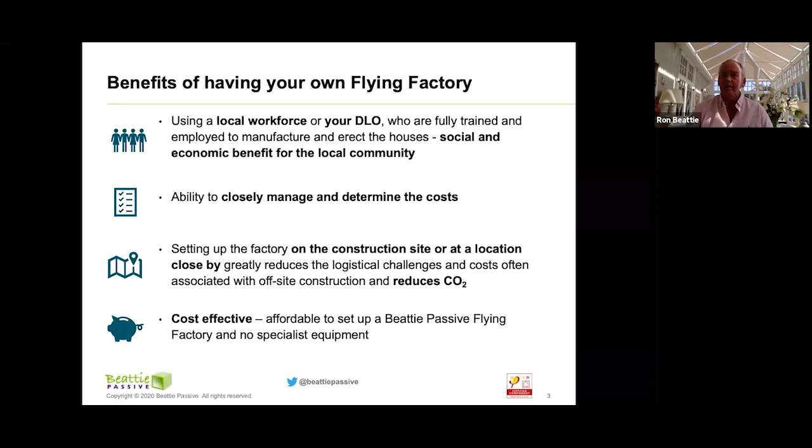The reduced risk. I think risk is a big thing in building, and we found the insurance industry and the warranty industry incredibly volatile. And as we're going through now, we're going through a massive change where we've got a lot of people really concerned in the warranty industry about new ways of building. So with Beattie Passive, we're trying to reduce that risk. We're looking at each part of that. And by building it yourself and being trained yourself and having all the inspections yourself, you're drastically reducing that risk.

Because at the end of it, someone's going to come down and look at every single building you've built as a partner with their own PI insurance, and they're going to sign that building off. So they're going to say, I've looked at your building and you built it correctly. What a wonderful thing to think at the end of the day, you've gone back and you know that building's built right and as it should be, instead of just relying on other people and other things.

So the risk part of it, I think, is very important to Beattie Passive. And we're looking across the board, from design right through to testing, at how we reduce that risk for you. And being able to guarantee that you're going to reach Passivhaus. Wow. I mean, many companies and many people have tried it, but we do it regularly every week, and it is very simple.

Faster delivery. If you can make it on site and then move it 100 yards, wow, it's a lot faster than actually manufacturing miles away and coming in. So you can determine that. You can determine the workforce, and it's fast. It's timber frame. It goes up really fast. Made in the morning, put up in the afternoon. That's how simple it can be.

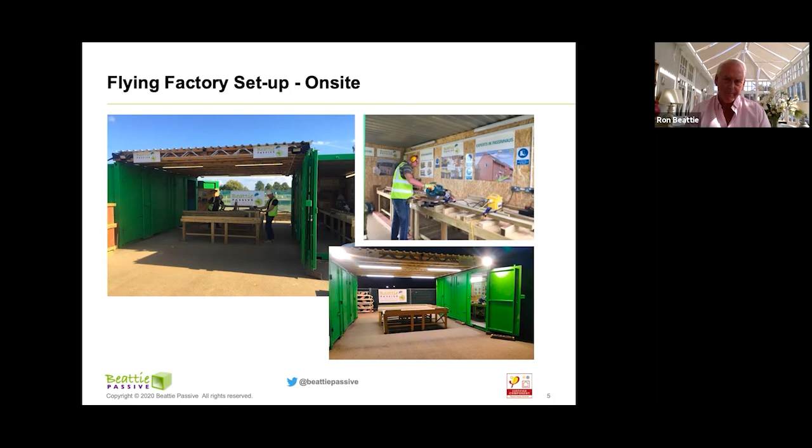So again, not expensive. Probably the whole thing set up there was under 10,000, buying the units, painting them, putting the benches in, doing the health and safety, doing the lights, a very cheap way of putting an on-site manufacturing process in place.

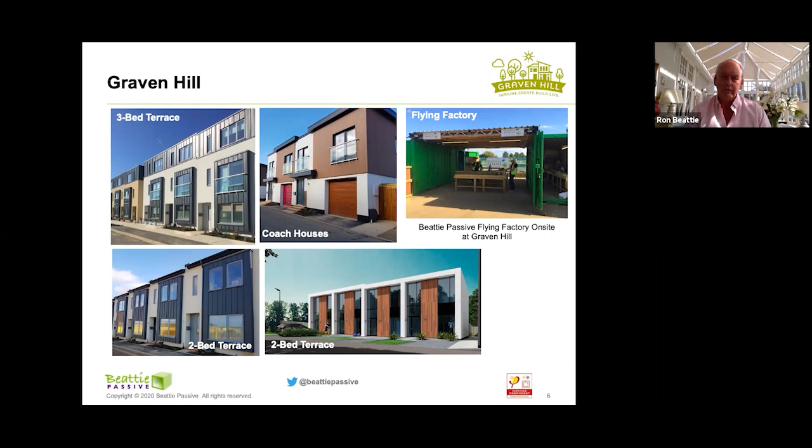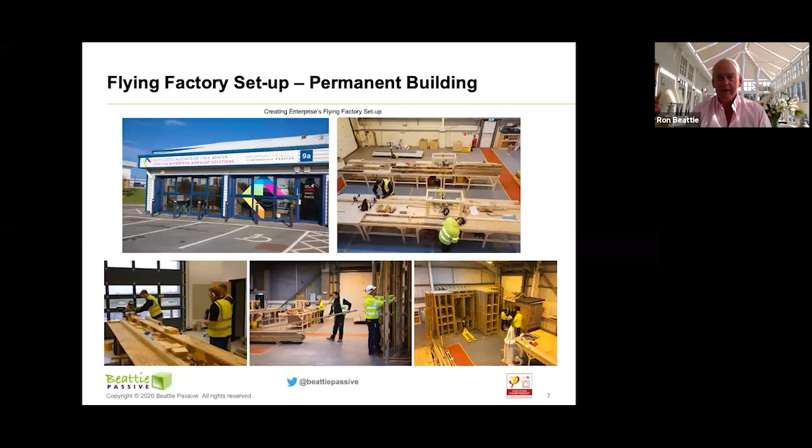So what's the training, what's the cost, and what do you get for it? We do our in-house training, and I'm going to go through each of these in stages, but just a quick one as we're going to go through. We've got our in-house training, which you do at our manufacturing facility. And then we go and actually help you set up your factory, whatever that may be. And then we do our on-site training.

So we're not just showing you it in a classroom place. We're not just supporting you in putting it up. We're then going to give you the support to actually help you build your first units, and then keep supporting you throughout that. And then we've got our experts that come around and monitor and help you with that process as well. So this is a partnership.

It's not a one-off figure that you pay and then we let you get on with it. This is going to grow. Excuse me, lose my voice a bit. It's going to grow into a real partnership where we work together to look at your projects, to look at the way you're going to deliver them, and work together to see how best they can be done and what's right for that site and what's right for you.

The in-house training part is a 2-week course. You come and stay in Norfolk, or your 4 guys do, and these are 4 people that have got, I would say, on-site skills. They may be a bricklayer, a plumber, an electrician or a carpenter. Carpenters are best, of course, as it's a carpentry-based process. But these are the guys that are going to be the key workers, your guys who are going to be trained to actually deliver.

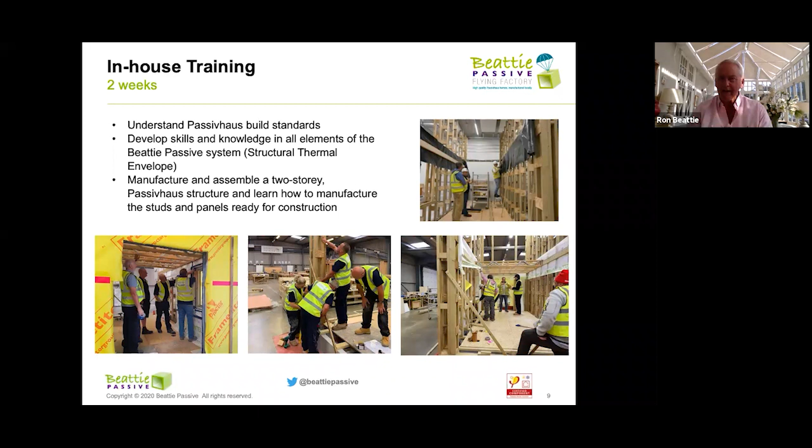And it's lots of training also on our 3D modeling. So you've got a model of what you're going to build before you actually build it. And you're taught how to understand that model, how to read the model in a real detailed way, and then stand back and say, I'm going to build that today. And wow, I've just built that section of it. So very, I'd say, hands-on. This is what we're going to build today, and we'll go out and we build it.

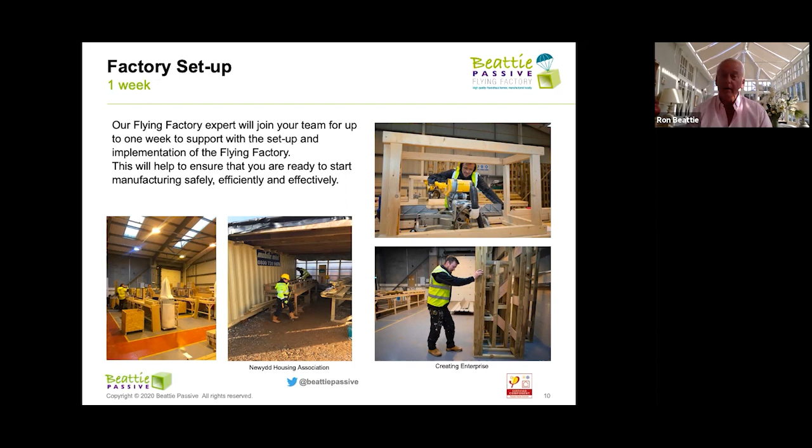We then do 3 weeks on-site training, and that's split over a period of time. So what happens is you will start off, you will get the ground floor, and then we will come in and spend a week with you. And that week will be getting the floor completed, setting up the walls, making sure that you understand the corners and squareness of a building, and getting that building up. And then throughout that stage, we will spend time with you in week tranches to make sure that you can fully deliver. And so far, everybody has.

Because the skill set is easy. The guys that come onto it are 100% on board, and the skill set they've got is well above what this process is. So it works really well. And then at the end of it, they all work as a team and are so proud of what they've turned out. It really is amazing.

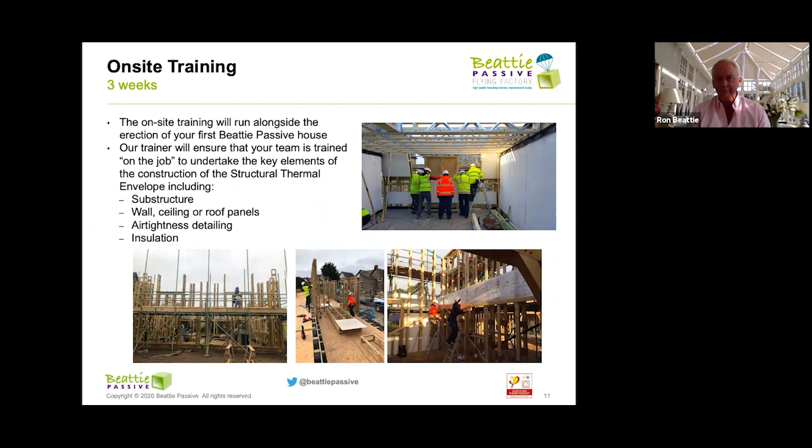Then we've got our regular technical experts, and when there is an issue, we're on the end of the phone. And because we're using 3D, because we've got the 3D models, we can really well communicate with those guys on site. And because there are only 13 components, they all go together the same way. We only use those components. It's really a lot of common sense that goes into it. So we don't have many issues, but when we do get one, we're there to help.

And, you know, if we've got a very complicated roof structure or something, then we will send one of our people down to help you. So it is a partnership, and we are there to help. But the experts have done it all before, and they're at the end of a telephone, or they're on site when you need them.

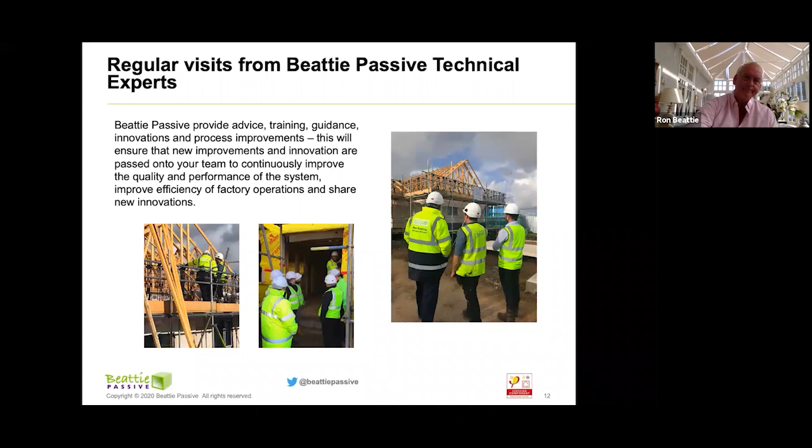So the responsibilities really are us in our 6-week training program. But then every home that you build is designed by the Beattie Passive process. So when you come onto the Beattie Passive and have a drawing that goes through our design system, we do the SAP, EPC, foundation design, we do the PHPP, we do the 3D modeling, we do all the technical drawings, we do all the testing in that model.

So that goes on each of your projects, whatever you build, whenever you do them, you're part of that process. And as we go through that, technical issues come up, and we work with you to overcome those technical issues and make sure that the building is right so you can erect it, but keeping to our Beattie Passive standard. And at the end of that, once you've delivered that building and all the certification's been done, all the testing's been done, then we will give you certification for that project.

And you have a certification signed by me that says that that design has reached that standard. And it's an exacting standard. You know, it's probably the best in the world. For every other bit we do, we're not about focusing on one thing. Your fire is 4 hours, and your sound is 5-6 times better than building regs. You know, just 2 little elements like that make us stand out.

So you've got to train your team. You've got to send those guys on the course, and you've got to pick them for the longevity they're going to be with you, their skill set, and I think the ability that wants to learn and wants to do it. And then you'll go and manufacture those properties and erect them. And you've got to buy into that as well. We need to work as a team to be able to do that. But it's not rocket science, and no one yet has had an issue with it at all.

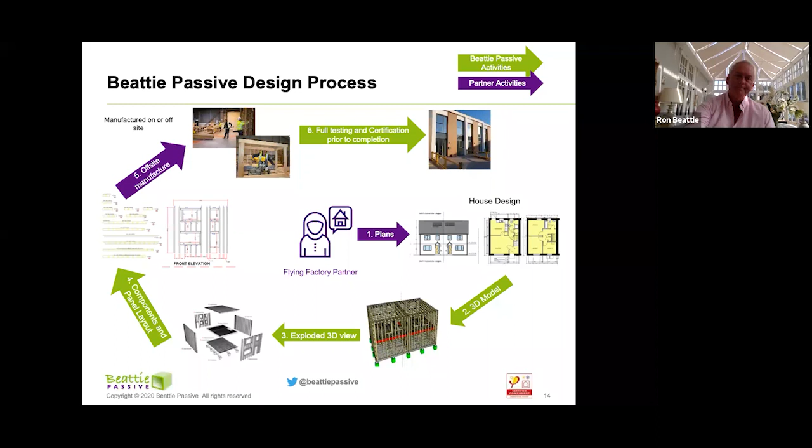So, change takes time, but the industry needs to move forward, and we need to find new ways of delivering better and more zero carbon homes. And we believe Beattie Passive is one of those opportunities. Toolshed, one of our partners, and these are little case studies we're going to go through. A wonderful group of youngsters came on the course, one of our early ones, been probably with us for 2 years now.

Toolshed is a company that looks at young people, ones that have been disadvantaged. Some of them have been in care. Some of them have had problems with the police. But they're all looking for something. They're all a bit of tearaways. And this group of youngsters came down to our training facility. And I can remember it now, there was a group of them, they came in and they all sort of slumped around, and there was a trainer with them.

He didn't know them all very well. They hadn't long started, but they were all a bit of a terror. There was a young lady there, and she had more piercings in her ears and her nose than I could probably count. God knows where else they were. But she was a real character, and she piped up about everything. She piped up because it was too hot. She piped up because she didn't know whether she'd like the lunch. She was just one of those characters.

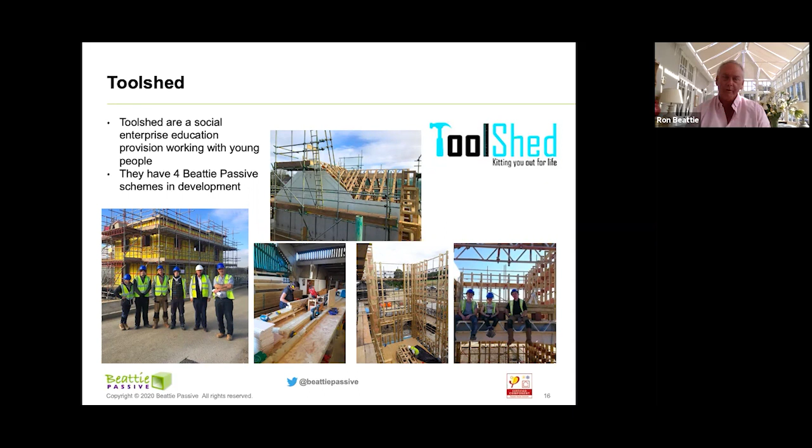Fantastic. And then we've got Creating Enterprise up in North Wales. They're doing a fantastic job again. Got a very young workforce, but real pride, and are going to be a real strategic partner for Beattie Passive going forward. And I've got a lot of respect for this organisation, Cartrefi Conwy, that really are passionate about young people, about the residents, and want to do things correctly. And for me, it's fantastic when I walk through these sites and I speak to these people and see the pride and the delivery.

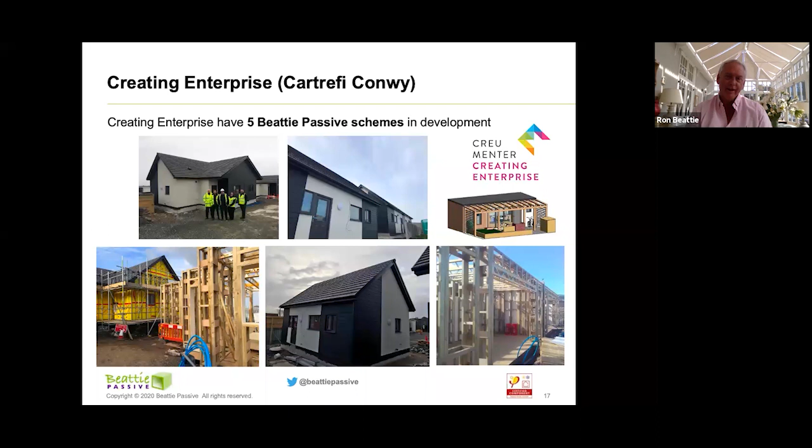And this one here is next to a primary school. And one of the chaps, when I went there, said, Ron, these houses, I don't understand them. And I said, well, why is that? He said, well, the school there is really noisy. All the kids are running around. And then he came over and he just shut the window and you hear nothing. He said, I don't understand how it works. And it works because the buildings are really insulated with really good acoustics. But that's just one thing. But the pride again was phenomenal.

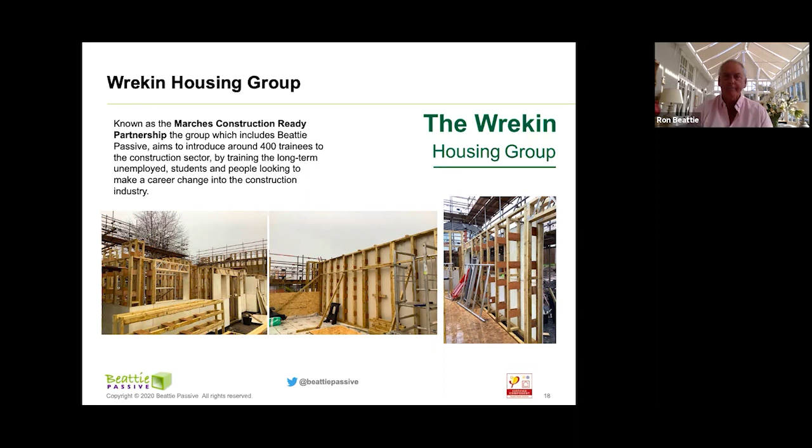And then we've got Wrekin Housing Group, and this group are working towards a whole new apprenticeship scheme for 400 trainees. They're looking at one site of 100 units. Completely rethinking the book. How do we now take our housing in-house? How do we deliver the housing with the people that are actually going to live in them? What's going to change all these youngsters' careers in our area, and what's going to ultimately pay for these houses when people rent them? So real long-term thinking here, and I think we're going to see a lot more of that in the future. So hats off to them.

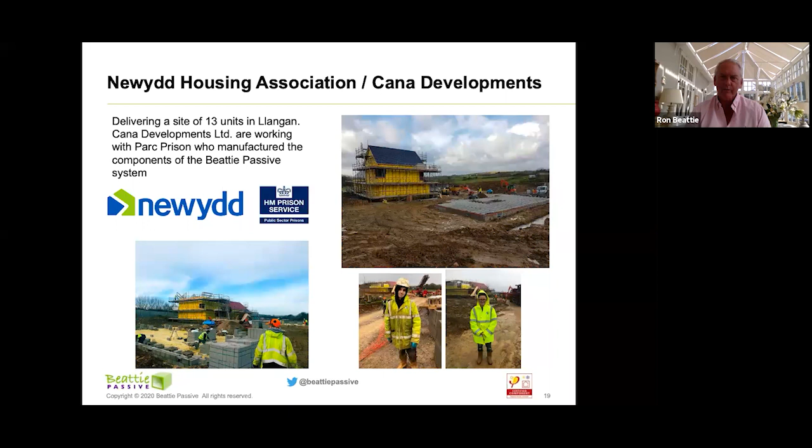And Newydd, a company up in Cardiff, where they've been really interested in working with the prison services. So the majority of the components have been built in Parc Prison. And Beattie Passive is very much connected with how we work with prisoners, and how we want to stop recycling £15 billion a year of money that just goes back to putting people back in prison and causes all that heartache that we all go through if we're unlucky enough to be broken into or damaged in any way. So a great little company, really interested in delivering Beattie Passive homes. So a great company to keep your eye out for up in Cardiff.

So that was quicker today. We're going to have a question and answer now. I'm sure that some of you may have some questions for me, and we're very happy to take you to certain sites, to give you the opportunity to speak to partners. We're going to do this together.

It's not easy. What the industry is going to need, and certainly after the issues that we are at the moment, is we're going to need something different. We're going to need real belief in what we can turn out. We need to change people's lives, and we need to do it together. So I think we're in a phenomenal opportunity coming out of this year to really make a mark.

I think government's going to do its bit. I think they're going to do their bit to allow people to take this sort of thing on, to give them the means to be able to build their own homes. And we've seen that with the right to build, with the Bacon Bill, with people building their own homes. We're going to see that a lot more in custom build and that type of thing going forward. So I'll take any questions if you've got any.